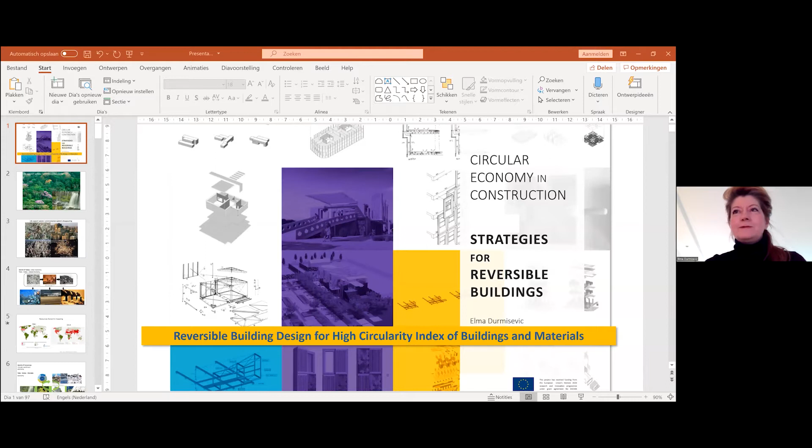Thank you very much. It's really a pleasure to be here, and thank you very much for the invitation. I found the concept of this festival really great. It reminds me of some initiatives we started in Europe, really bringing different stakeholders and creative industries together around a very serious subject, which I will also address in my talk today: how do we make a transition towards a more resilient design of the built environment and more effective use of resources on our planet, which is becoming more and more urgent.

So I will be talking about a new approach in design, which I call reversible building design, and we'll address some tools as Maurizio mentioned. I've been working in this field for more than 20 years and developed, within a number of European projects, tools that can help us design buildings in a more circular way, but also measure the performance of buildings, because we are creating a new world, which I like to call the new reconfigurable world.

That means that we need to develop a performance measurement system in order to know how to progress and when we are reaching this new world.

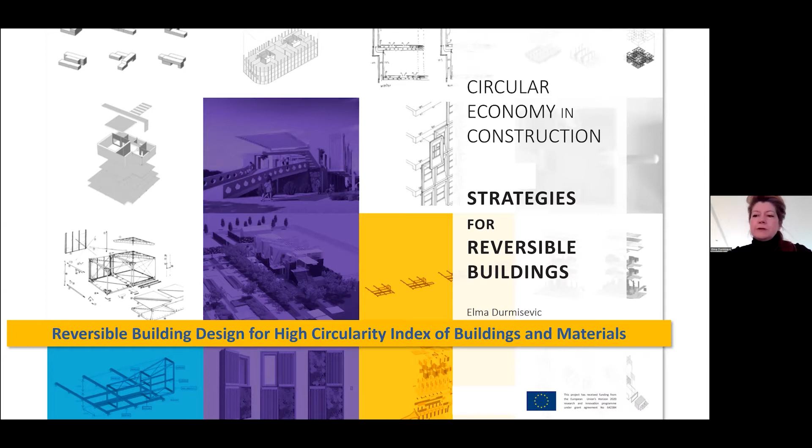The main driving force behind everything I will be talking about is definitely the great issue that we are feeling actually on a daily basis now with climate change, but also the latest wars that we are witnessing today, which are very much also about resources and how they impact economic systems. So it's very much how do we deal with the life support system on our planet, the environmental system, which gives us clean water, oxygen, and food to eat.

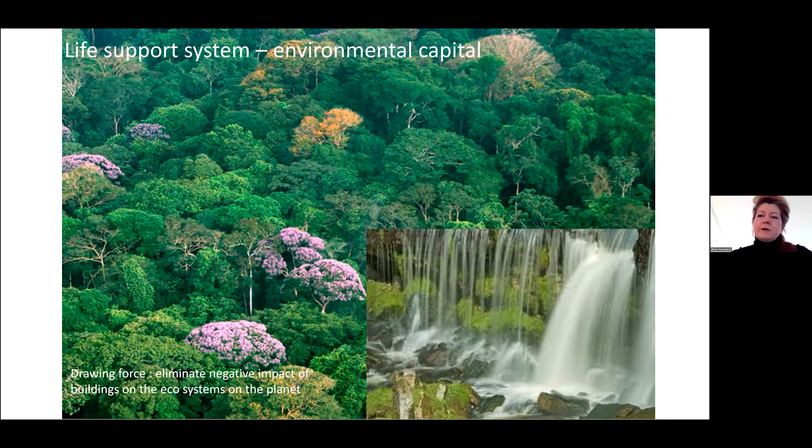Knowing that the way that we have started to use these resources, and the way we process them into a built environment, created negative impacts on the whole ecosystem of the planet, bringing us to the question of where we are now and what is the sustainability factor of the things that we've been doing.

I think we all agree these days that this sustainability factor of the approach of the economy of the 20th century is behind us, that it is not sustainable, being primarily focused on one linear approach to the use of resources.

On the other hand, when we look into the way these resources were used to form cities and the built environment, there's also a lot to be done on the shifts in our approach, how we create cities and buildings within cities. Obviously, now we deal with overpopulated cities, and the shift of population towards urban environments will increase even more. But the negative impacts of these tons of concrete and asphalt that are creating city structures which are not absorbing water, which are not producing clean water and clean air, are becoming devastating for living in them in general, but also for the planet.

So the key question is where we are now with this linear economy, which is based on taking, resourcing, making products and throwing them away, creating waste. The linear economy is also heavily focused on industries based on fossil fuel energy sources.

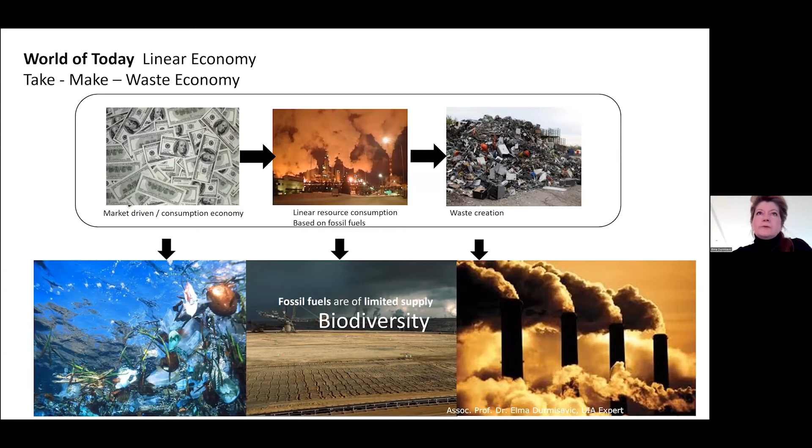Next to that, when we talk about the physical parts of the built environment, and really the resources which go into the products that we use, but also buildings and cities, it is very important to have this map in mind, which presents a resource footprint of countries produced by the Global Footprint Network on a yearly basis. What it tells us is basically how much resources are being used per country per year, compared to the resources that these countries have at their disposal per year.

What you see here is a different color scheme from 1961, when the planet was more green. That means countries had more resources at their disposal than they were consuming per year. This color coding started to shift towards more red in 2014, and almost half of the planet was turning more to dark red.

These red countries imply that they consume on average 4 to 5 times more resources per year than they have at their disposal. That means they are heavily dependent on the countries which are still green, but these greens are also becoming less and less green. And that is actually very well implicating the issue that I want to talk about when we talk about circular economy and circularity, and how do we introduce circular concepts in construction, and why.

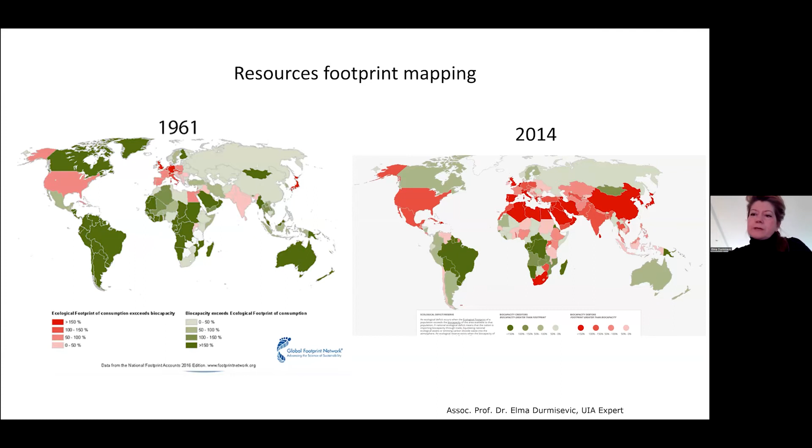It is very much about the way how we treat resources in all of our products. And as I showed in the previous slides, the linear approach to resources which brought us to these color coding schemes is obviously not sustainable in the long run.

The way forward definitely is in envisioning a new world, a remake world, where the waste from one system would become a resource for another one - what Cradle to Cradle, and Michael Braungart, introduced also like 15, 20 years ago as the Cradle to Cradle concept. But it definitely has to be pushed further and be taken into account when producing all products, from cars to cities.

So when we zoom into construction and the way how we build, the vision which we have here in Europe is definitely that this previous slide is a kind of priority that we want to go towards. The circular economy is number one on top of the list of the European Commission's policies for the future. But there is a long way to go when we look at construction.

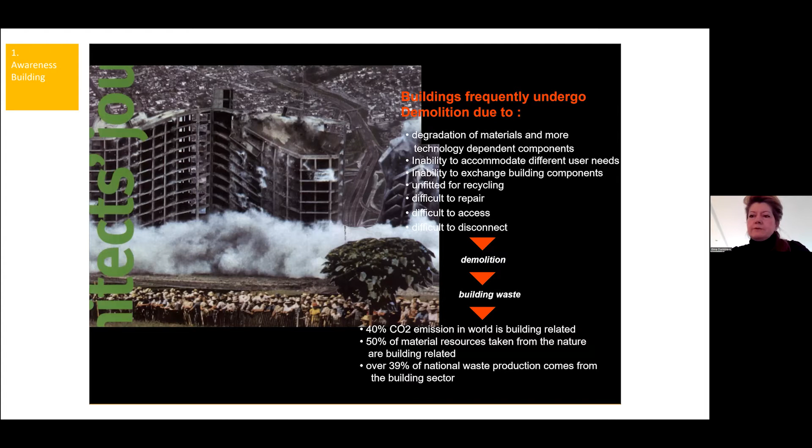So mainly from economic reasons to start with, the tendency is to demolish buildings because it is much cheaper than employing a lot of labor on these very labor-intensive deconstruction processes. But obviously, this results in huge CO2 emissions, material resources being lost, and waste production going up.

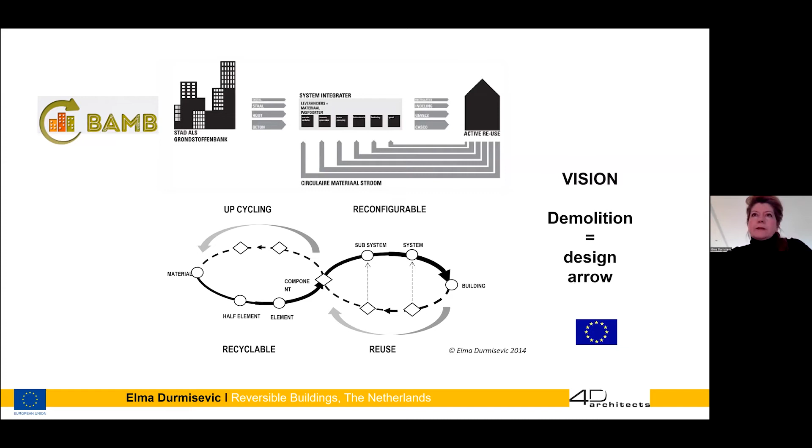As Maurizio mentioned, couple of years ago, about 7-8 years ago, I was one of the initiators of the European project Buildings as Material Banks, aiming to bring urgency and discussion on how we move further in design of buildings, how we define the whole system, and how stakeholders need to act within this new system of circularity and circular economy in construction. It became very obvious that in order to move further, we need to start seeing buildings as material banks and develop and enable materials to stream through different material feedback loops through their life cycle.

And that can be done only by a new approach in design. So this new design task would be to unlock the multi-layered capacity of buildings by understanding and identifying the three key dimensions of transformation that every building has, and unlocking the capacity of each of these dimensions, being a spatial transformation level, the structural transformation level, and material transformation level.

And this concept of three-dimensional transformation within buildings is heavily supported by the way buildings are put together, and definitely design for disassembly is playing a very important role in achieving the full circularity and the three-dimensional transformation.

This brings us to the notion of a new generation of buildings, which is the reversible building. The reversible building brings a new paradigm shift to construction, a new perception on buildings, and moving away from understanding building as a static product and static structure.

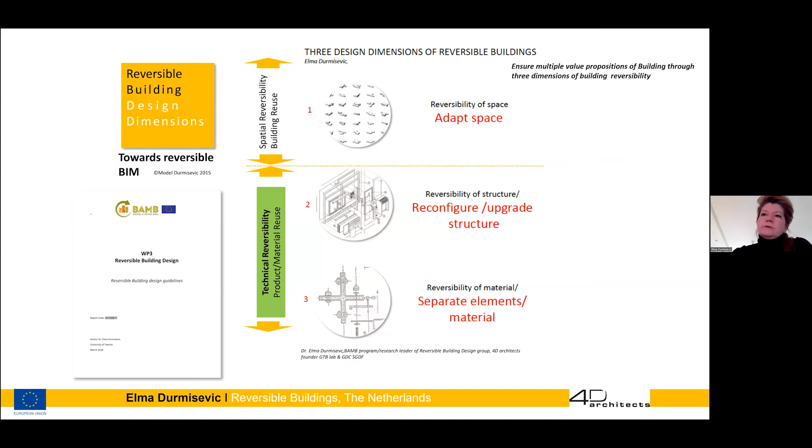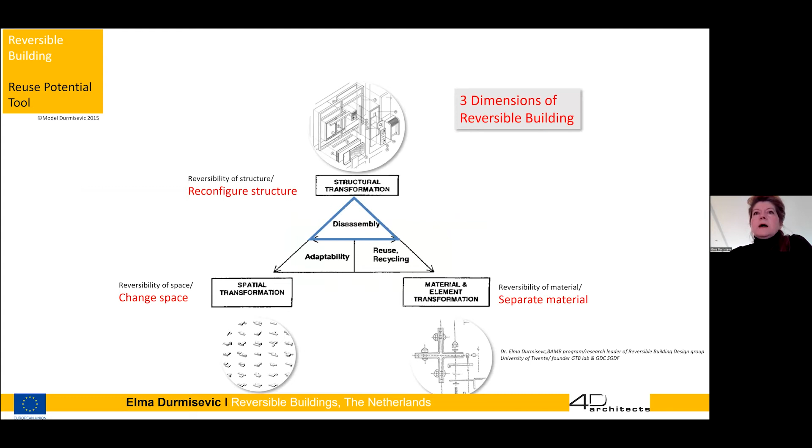These 3 dimensions together form a basic triangle of a reversible building, which has 2 major pillars: adaptability and reuse, supported by disassembly. And that was for me the starting framework for everything I've been working on in the last 20 years.

By defining this framework, it became possible to get a better understanding of the performance of buildings, to develop tools and design protocols for the design of such buildings—tools enabling us to understand the performance, reversibility, and circularity of buildings, and to cluster and systematize all buildings into three major groups: irreversible, partly reversible, and reversible structures. I'll come back to these tools later in my presentation and tell you much more about that.

But to start with, of course, when we want to take these big steps to a new world—very different from the existing one in terms of how we treat materials and how we build buildings—it is very wise to try to understand the full capacity of the existing buildings.

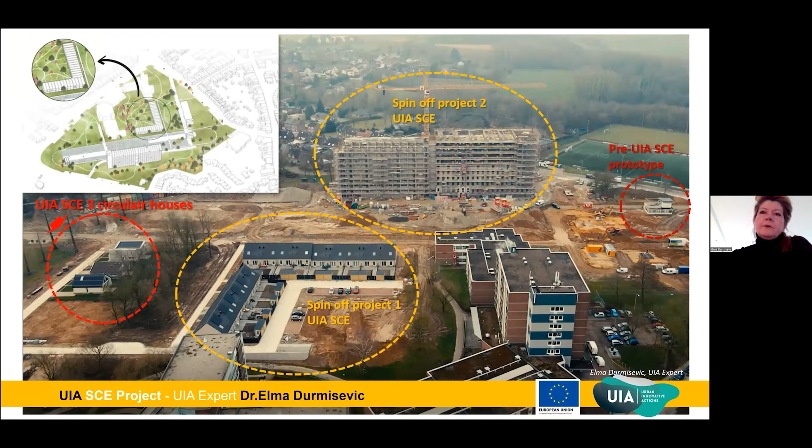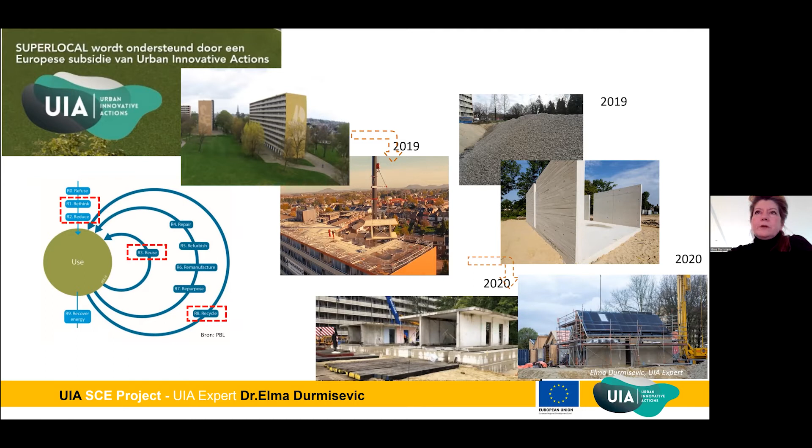And that's what we've done on a project in south of the Netherlands, where the exercise was about literally decomposing a 10-story apartment block, and trying to reuse all of its parts in construction of 3 new houses, and actually understand the processes behind that. Of course, the cost issues, but techniques to deconstruct and also techniques to build new ones, just to understand really what is the capacity of the buildings that we have around us.

And in the Netherlands, there are many of these kind of blocks built, especially in the 70s and 80s, and a big portion of the housing stock is made in such a way.

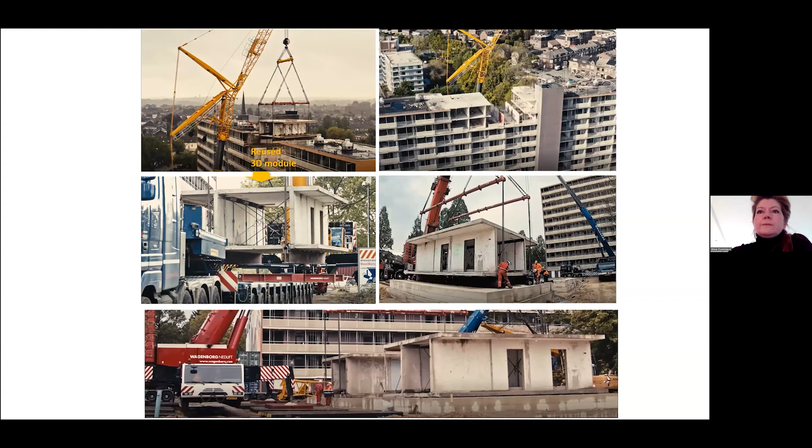So different recycling and reuse strategies have been tested, starting from creating recycling aggregates from existing concrete, to crushing parts of concrete into creating bigger chunks of concrete and using that as a facade, for example, going to really cutting of 3D units with the aim to reuse the structural parts to build this new structure for new houses.

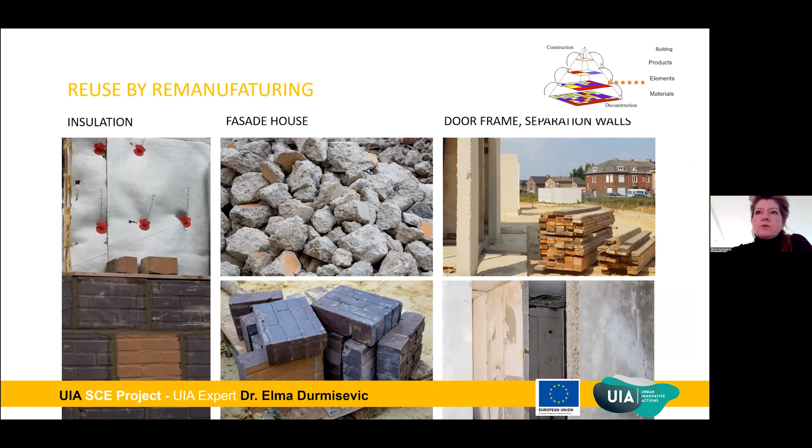At the same time, also the reuse of insulation has been tested, cutting of brick facade into smaller blocks, also cutting of some inner partitions of light concrete walls, on-site recycling and construction of recycling concrete has been done, and resulted in construction of these 3 houses, which have been built using 95% of materials from the donor building, which was standing next door. And a number of techniques have been tested there.

Of course, as I mentioned, this has been used to try to understand the impacts of these kind of processes on the environment and economy. And obviously, we did figure out that some techniques, many techniques actually, but for example the cutting one, if we compare it on the cost side, that exercise was like 10 times more expensive than making just a normal load-bearing structure out of new concrete.

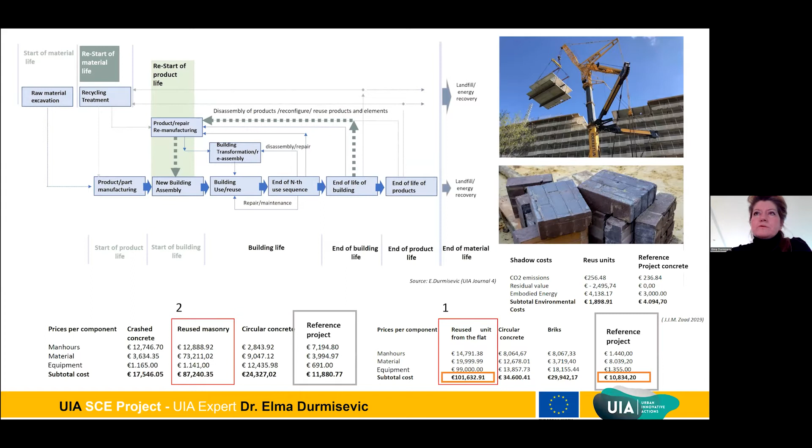And on the environmental side, as far as CO2 concerns, there were not much savings because lots of machinery had to be applied, transport and so forth. So that was tricky as well.

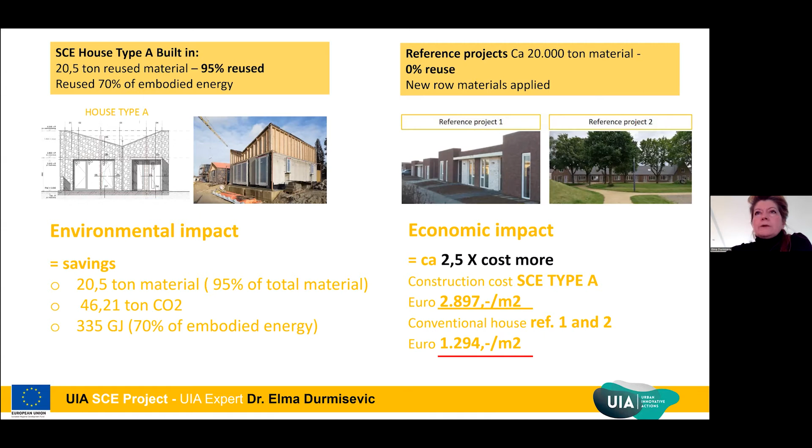But all in all, we did figure out that there are significant savings in terms of reusing of materials. So 95% of materials were literally brought into new houses. Also a significant amount of CO2 has been saved in embodied energy, but on the cost side, on average, the construction of these 3 houses was 2.5 times more expensive. And as I mentioned, it had very much to do with the processes around recovering, which were very complex, involving 5 to 6 different stakeholders, creation of new platforms, transport platforms, and so forth.

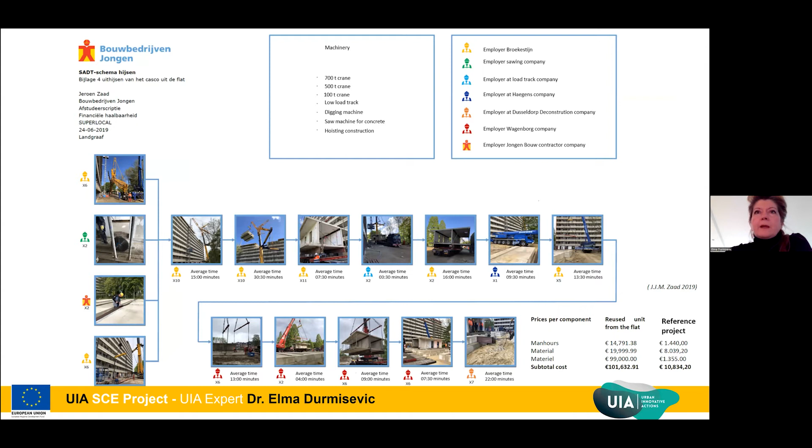So that all actually illustrates how complex it is to go to high-value recovery of existing buildings. On these lessons learned, the idea was to use the good, positive parts that we learned through the projects and try to build another 15 houses.

And what has been done then, of course, realizing how important it is to create kind of reversible structures where you can recover elements and reuse them again, and easily recover this, not with kind of heavy processes around.

The new products were developed, as you see here in the upper left corner, for recycled concrete, a kind of new shaped concrete block for the wall structure, or the brick, a dismantleable brick system for the facade of new houses. And obviously that would bring significant improvements in the costs, and did bring improvements in the costs. Although these new 15 houses were quite simple, cost-wise, the difference was much.

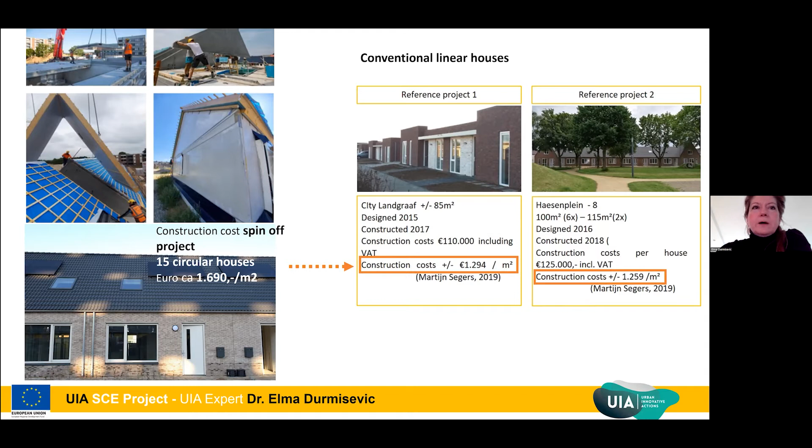So the new 15 houses were built with lessons learned, and the idea was to try to create as much as possible reversible houses, improving some existing systems on the connection side so that they are easily dismantleable, and trying to fit into the financial framework of the housing corporation. So it was promising, but we are definitely still not there. But the direction was quite clear.

Based on this quite heavy exercise, which took place over 3 years, there are a number of reports you can find on UIA sites. I wrote, I think, about 5 journals, and I'm now writing the final one on the final lessons learned. So you can find lots of concrete data there as a result of this exercise. But I also used that to provide recommendations to policymakers in Europe on the next steps, and what are the biggest barriers we see these days on the implementation of circularity.

Of course, we have to look into the position of the stakeholders and the fact that this conventional supply chain is not applicable. We saw that the stakeholders in the design, construct, deconstruct process are shifting in these kind of circular projects.

But most importantly, the focus is on how we basically enable, provide new economic boosts and create economies that will support circularity in construction, because it was obvious that circular economy does not exist at all, and that the existing regulations are not supporting circular construction.

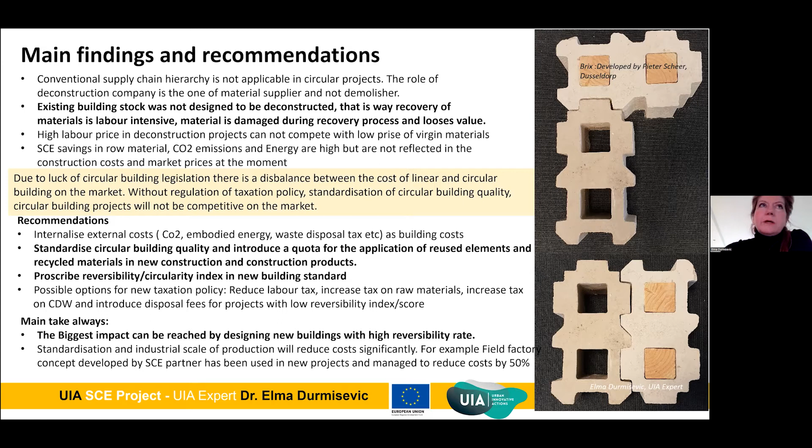That brings me to the new generation of buildings that I like to talk about most, not just looking into what has been done, because it is obvious that things were not really done properly from today's perspective. But let's go to the future and see what can be done to improve the situation for future generations and become smarter on how we build buildings and create cities.

This is the basic scheme of what reversible buildings, future buildings, are. They have two key elements, as all buildings have: a spatial one, which is reversible, and technical aspects, which are also reversible. As I mentioned in my previous schemes, this concept relies very much on adaptability, reconfigurability of the structure, and separability of materials.

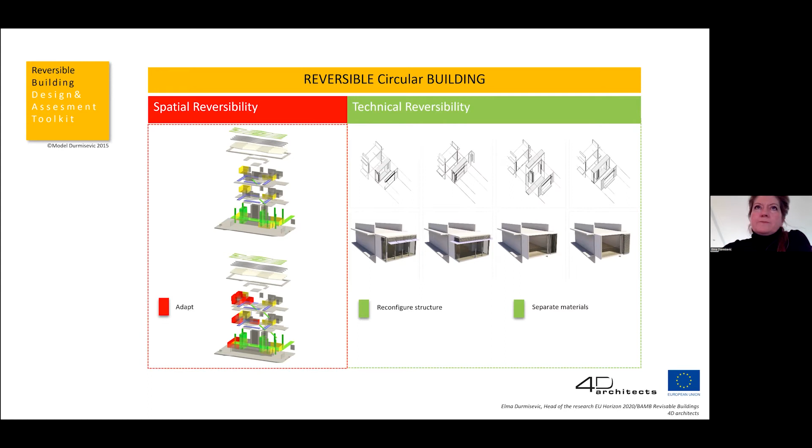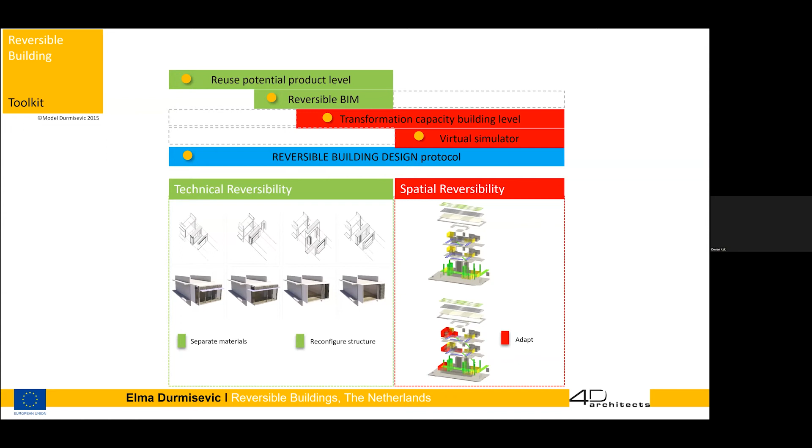Through the Buildings and Material Banks project, I managed to set up this whole toolkit, which enables future users, or the ones who really want to take this path, to first design buildings following the design guidelines and principles, but also measure their performance and use the tools during and after the design process to assess reversibility on the technical level and on spatial level.

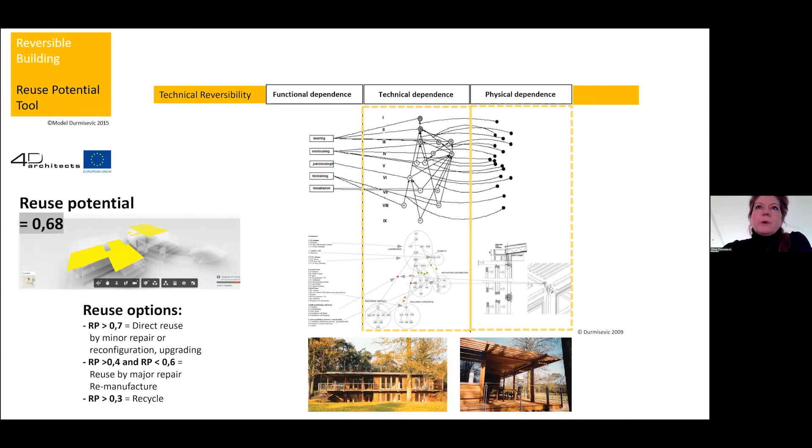And it results in a number, a score between 0.1 and 0.9.

And the transformation capacity tool looks into the ability of a building, its capacity, to change function or adopt different functions without demolishing parts of the structure or the whole structure. Just the level of core capacity is taken into account as one indicator, the capacity which also takes into account the space for future installation services and distribution of installations.

The disassembly capacity on the building level is mainly about separation of major building functions, the position of the core elements and fixed parts of the building structure, which will provide space for future changes, and the dimensions of the major block in height and width, which have a capacity for different functional configurations.

So those are 4 key indicators that are being calculated and have 16 sub-indicators, but I will not be talking about this one today.

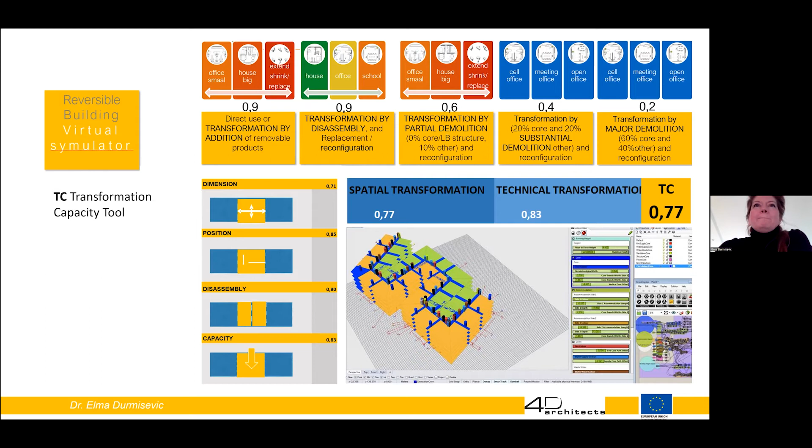And the design process, as sketched here, this slide is mainly to give you an understanding of which part of the design process each of these tools has priority in. Obviously in the preliminary design phase, the transformation capacity indicators play an important role.

And as we move towards the definitive design and technical design, the technical aspects of reversibility with their 8 indicators are then important to look at.

A number of these guidelines and definitions of indicators and so forth can be found in these documents on the BAMB website and on the European Commission's website. The principles for building design, which I haven't shown yet, have been integrated into circular economy principles by the European Commission.

So I will now talk more about this technical reversibility, and what is being measured to assess reversibility and reuse potential of building parts, and how these indicators are integrated into BIM to get a better understanding and to speed up the process.

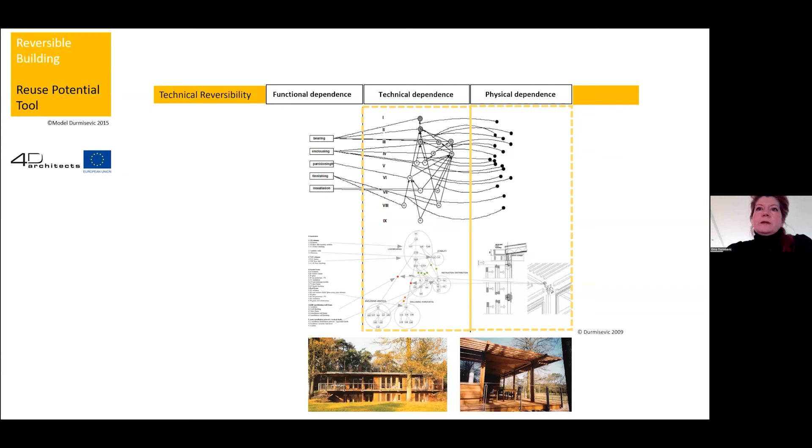So the three major dependencies addressed by this tool, which measures reuse potential, look into functional independency, technical independency of parts, and physical independency of parts. As I mentioned, these three dependencies that are measured are important to understand independency and exchangeability of building elements.

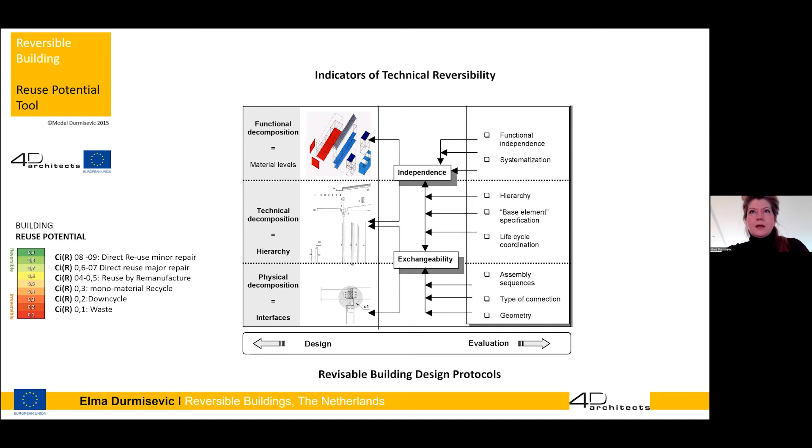And in order to do that, 8 indicators have been identified. I will go through each of them just very shortly, to give you an indication of what indicators need to be taken into account when measuring reversibility and reuse potential.

As I mentioned, one of the first is functional dependency and independency, looking into integration of maybe two functions into one element or not, and the interaction between different functions, which is very much present, for example, in the interaction between installation services and load-bearing structure.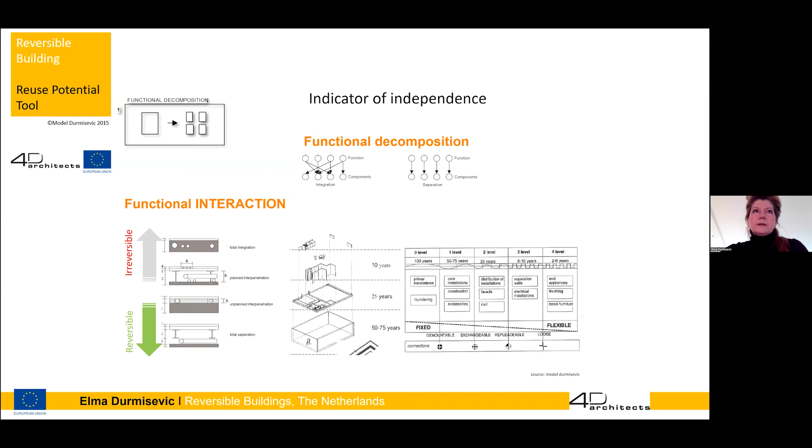The relational diagrams emerge once we start creating configurations and structuring elements into different functional groups or not. What you see here on the left-hand side, in the upper corner, unstructured relational diagrams are typical of the way buildings are built now, where it's very difficult to identify any system in these relations, and that's why buildings are being demolished.

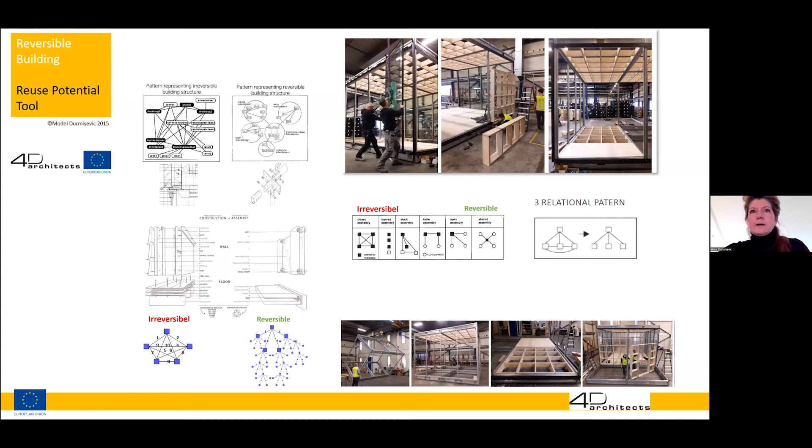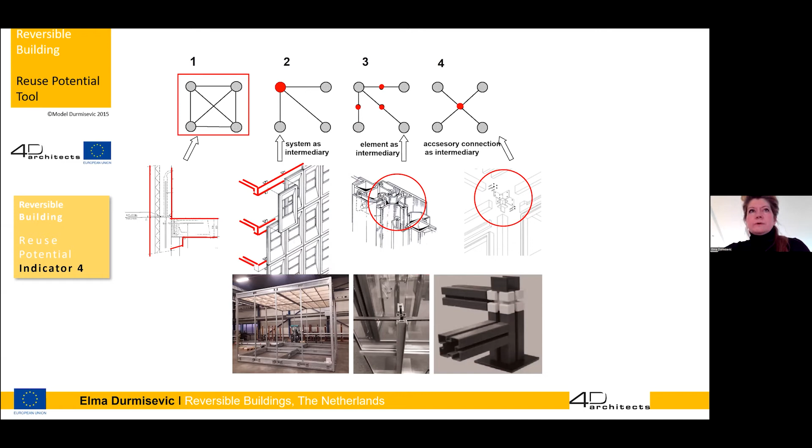These are different patterns of relational diagrams. And of course, we want to move more toward the lower level, which is a more open hierarchical diagram with structured parts clustered according to their functionalities. The base element is also a very important indicator, which helps us take one element out without affecting the other one. This base element is present on different levels of the building.

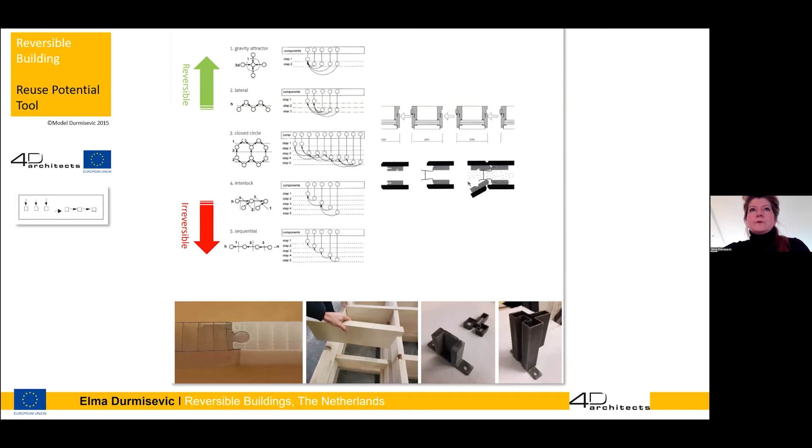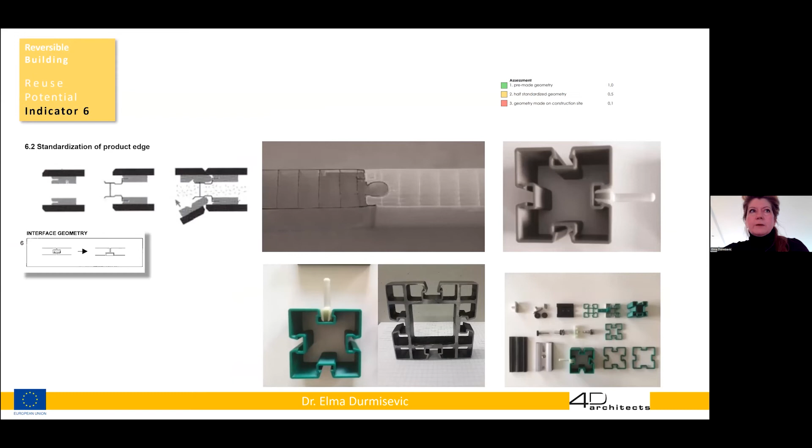Also, the assembly or disassembly sequences will affect the ease of taking something out, and whether it gets damaged during the process. The geometry of the component edge is also a very important indicator, especially when considering the damage that can occur based on the geometry applied. And the standardization of the product edge also helps speed up the construction and deconstruction process.

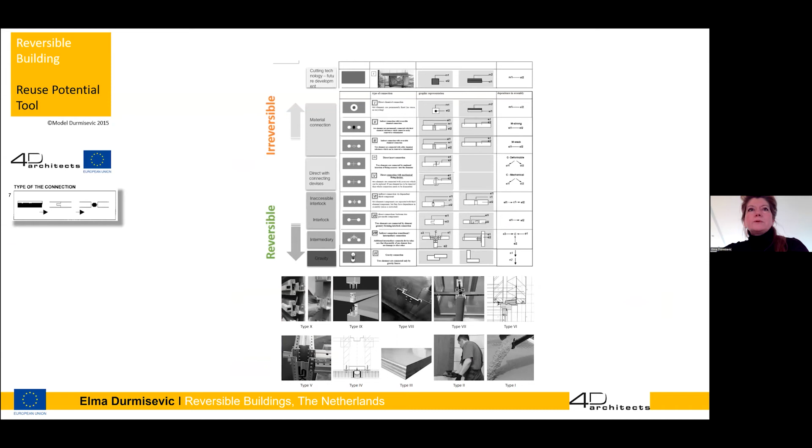The type of connections — there are 11 types of connections which I've identified so far, used in these tools, ranging from reversible to irreversible. And this is basically what the analysis looks like when you start manually trying to understand and figure out how reversible a structure is.

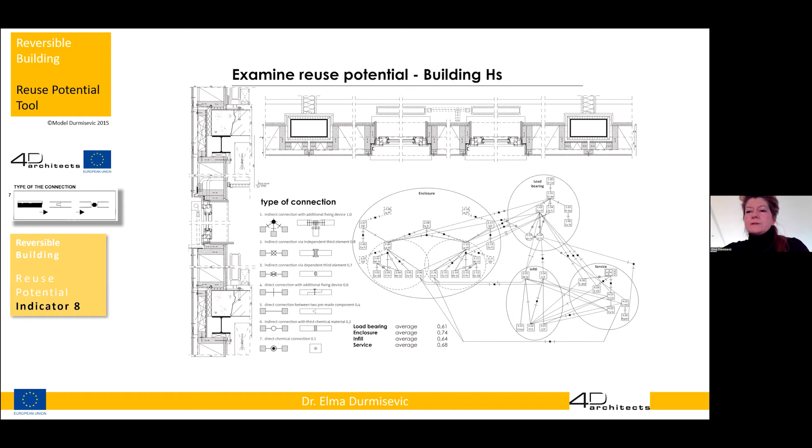I did this for a long time manually, literally just drawing these relations, identifying functional clusters, which belongs to which function, and the types of connections.

And the reuse potential score reflects the reuse options of this element in the end. At the same time, it reflects environmental and economic impact of the operation, because it measures how easy it is to take something out without damaging it, and to bring it back into a new cycle of construction. That means the energy and transportation needed to recover the element, repair it and bring it back is taken into account, and that is reflected in the environmental and economic impacts related to the score.

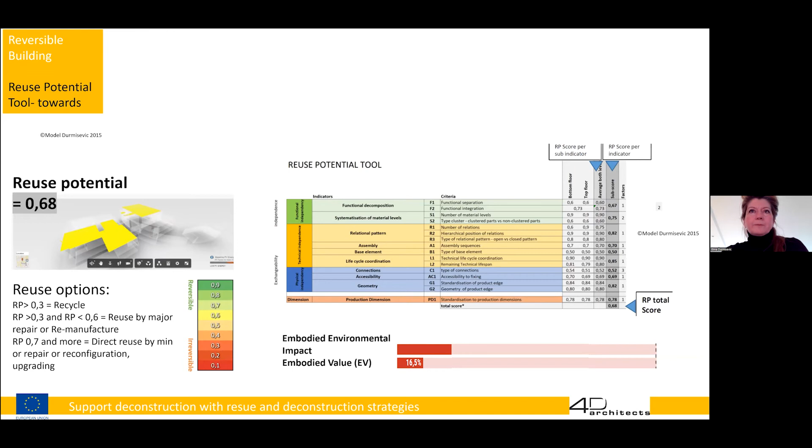So once again, when you start manually to assess, this is a part of Excel-based assessment of reuse potential, then this functional decomposition and technical decomposition matrix is created. On the horizontal line, when you move horizontally, you will see different functions that elements have. Each element is placed in the column of its function.

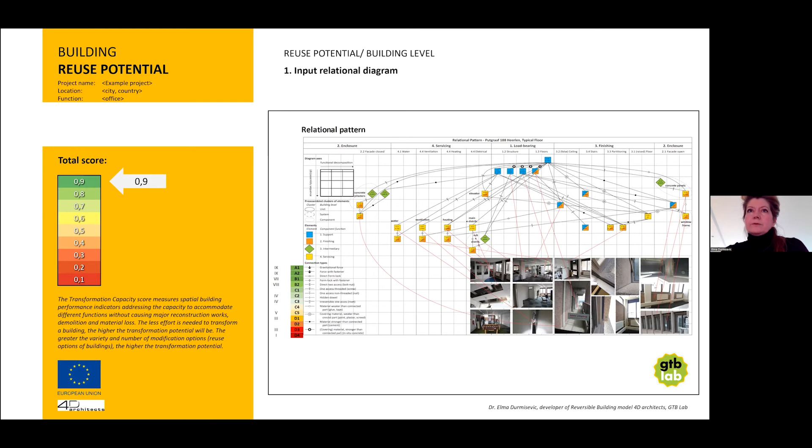Vertically, the assembly sequences are addressed. The element is placed in the sequence when it's being assembled, so that the dependencies in assembly are also analyzed, and how many steps you need to take out in order to take something out is taken into account. That's translated into the matrix that systematically illustrates when which element is assembled with what type of connection.

This is the base for the calculation in Excel, which results in a reuse potential score on a building level, where we calculate the reuse potential of all elements brought to the building site. Reuse potential score on a system level is the calculation of all elements within, for example, a facade system. And the reuse potential on the product level is the reuse potential of all elements within a window, for example.

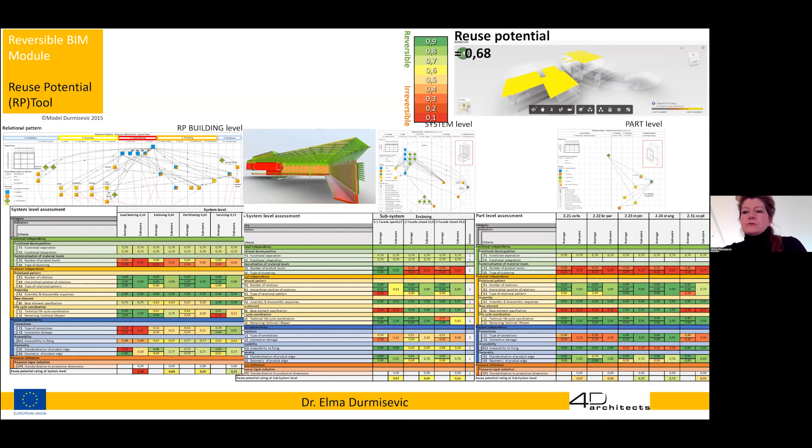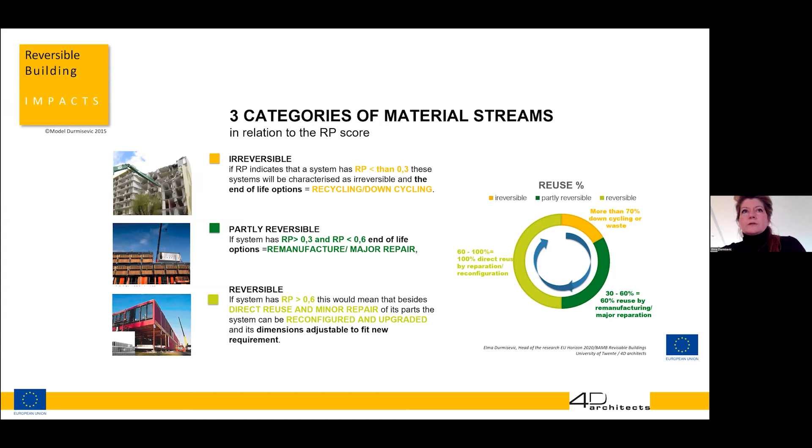As I mentioned, the reuse potential score is linked to the reuse options and helps categorize the results into three categories, or identify the category that the building system or product belongs to. It reflects the effort needed to bring material back into a reuse cycle again. The shorter the reuse feedback loop is, the less effort you need to bring the material element back.

That's why the elements which have direct reuse would score higher, with 0.9 or 0.8, for example, versus elements which have to be crushed down and recycled. They go back to the beginning, the start of the product life - meaning a recycling facility - so the feedback loop is much higher and bigger, and much more effort and energy need to be put into this recycling process. That's why the impact of this process from an environmental and economic point of view will also be very high.

In reuse potential scoring, it will be 0.1 or 0.2, just to give you an idea how that works. And this helps bring understanding of the circularity profiles of the building.

In this scheme, I also introduced a transformation capacity part, because of course the best thing is not to demolish at all. A building that can be reused would have high reuse, high transformation capacity.

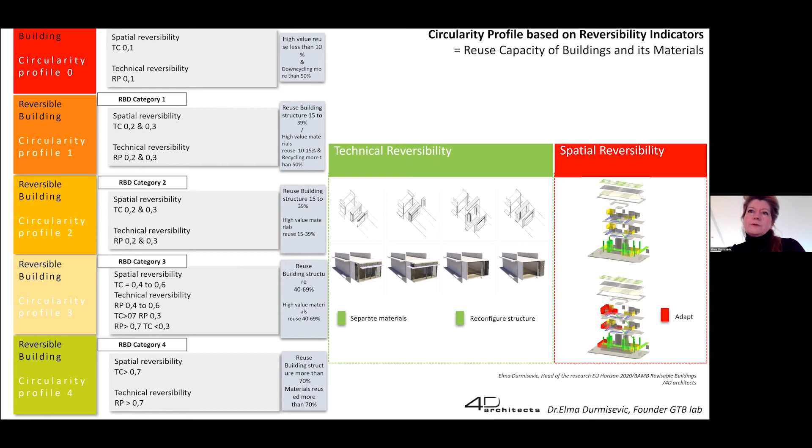So this circularity profile provides some kind of ambition ladder towards circular buildings, which is then used also in the procurement phases, to push your ambition towards which circularity level you want to achieve.

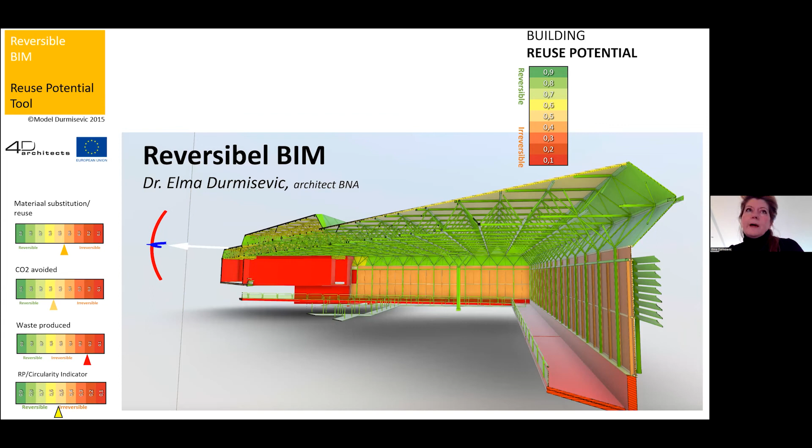So I was talking about this manual assessment of reversibility and reuse potential, and obviously you can understand that it takes lots of time to do this manual work. That's why at a certain point I decided to try to speed it up with integration into BIM and see whether that would work.

And this BIM, I call it Reversible BIM. This has been tested also on existing buildings, where we would gather information from the existing building, do the 3D scanning and create point cloud files of the existing building, then map drawings with the point cloud files, and then create Reversible BIM, add the plugins that I will show later on, do reporting, and that is working unexpectedly well, actually.

This is an example of a 3D point cloud file of a museum in the south of the Netherlands, which will be deconstructed at the end of this year. It's a Roman museum. So after scanning, the model was created, and as you understood from my previous slides, we need to be able to...

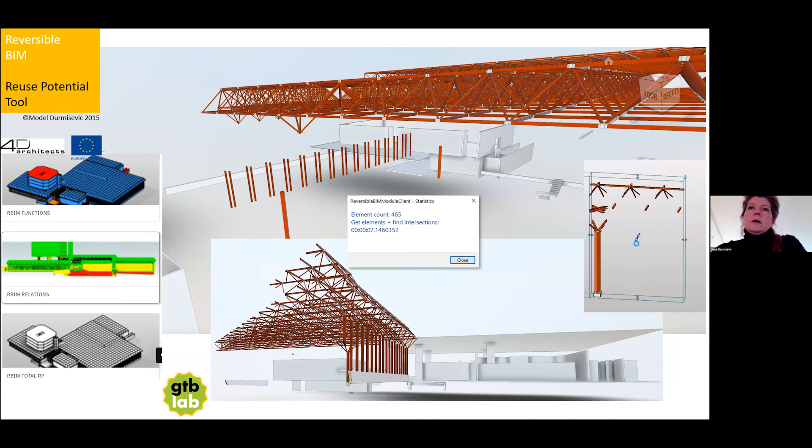analyze the relations between all elements. So it is very important to build a BIM model where you can identify all elements and also analyze interactions between the elements. There is a reversible BIM protocol which is put in place for those who want to use a BIM model to assess reversibility and reuse potential. Then modeling needs to take into account these features.

Later on, the materials are added. They use the ICE database in order to calculate avoided CO2 as well. But I also added the technical life cycle database from the Netherlands, because a model measures the remaining technical life of the parts.

The part which was quite difficult was to assess the technical life cycle of materials for old buildings or monuments which are not in the technical database of new materials. So I managed to set up a list based on talks with experts in renovations and architects working in renovation of monuments, just to have a start on that point.

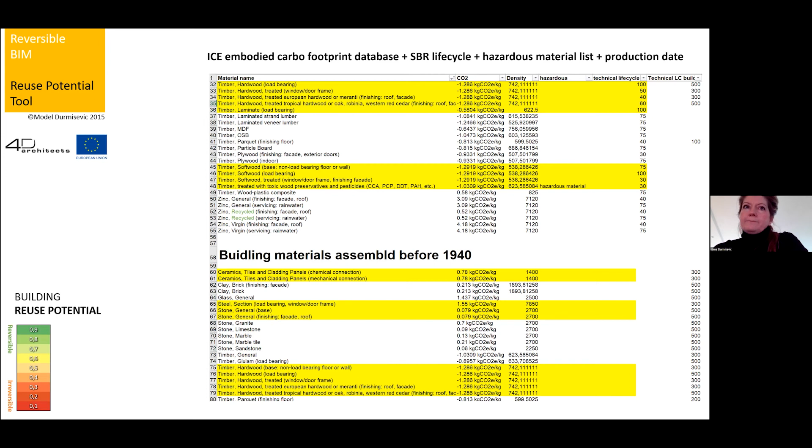Once that is done, based on the classification of connections, which I also showed, the connections are assigned to all elements. Of course, parts which have the same connections can be selected at the same time to speed up the process, and there's information on how many connections each element has and what type of connections exist.

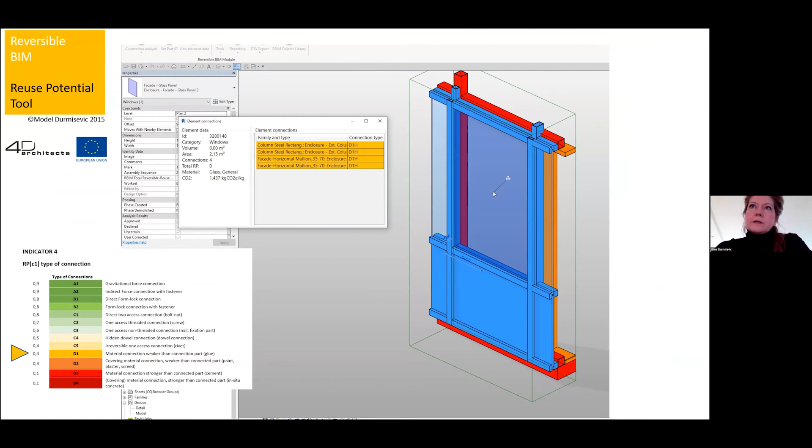Also, hazardous connections—as you see here, D1H—the H would mean there is a hazardous component in this connection, asbestos for example, and that information is also taken into account when assessing the reuse potential in the end. As an output, there are different types of outputs.

Just to give you an idea how complex buildings are and how this digitalization helps us get a better understanding of the complexities: this is a list of elements and the number of connections they have, and you'll see that the majority of elements have multiple connections and different types of connections.

There's also a difference between what I call connections to and connections from. When we assemble an element, we create connections to assemble that one element, but once the element is assembled, other connections are created with it to assemble other elements. This distinction is important when assessing dependency between elements.

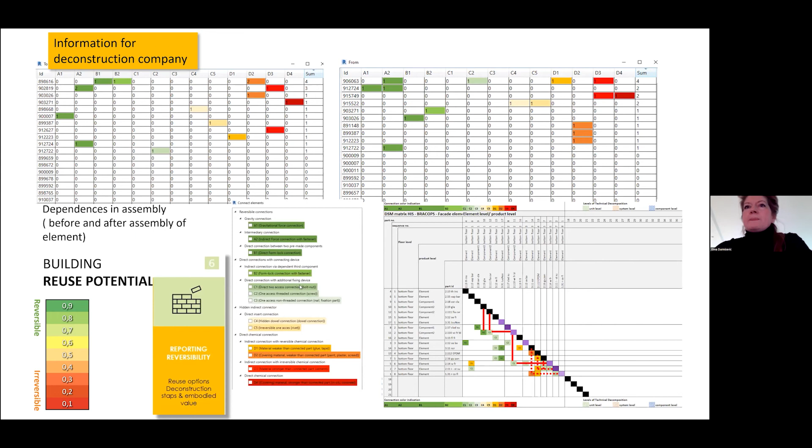This is the Excel matrix which I showed in the beginning—you see it here in a small scale in the corner, which was done in Excel.

Another slide just to give you an impression of the complexity that buildings have in themselves, and again how BIM helps us go and look through it.

These are relational diagrams, and these ones are now automated. You can imagine that in this museum we identified 7,277 elements, and the color coding here relates to the number of relations these elements have—elements with up to 5 connections are green, and more than 10 are red.

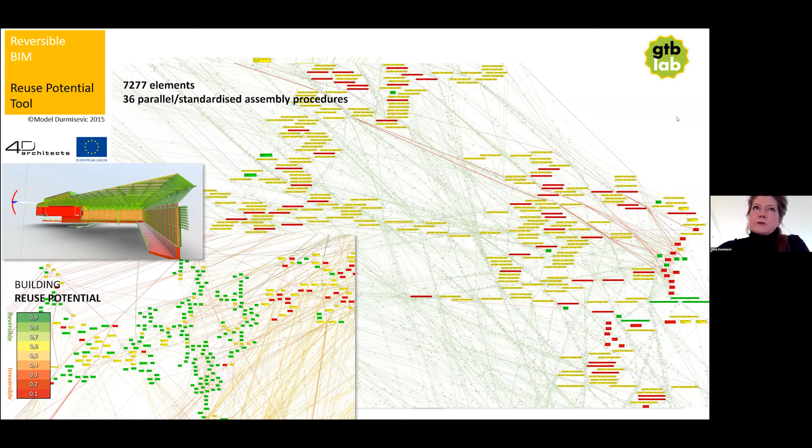But here we also identified 36 parallel assembly and disassembly procedures, which helps construction companies understand the construction process, for example.

So the indicators I was talking about in the previous slides when explaining the manual assessment are integrated into BIM. In the end, when all parameters are put into the model, one of the outputs is a color coding, which actually expresses the reversibility and reuse potential of individual elements.

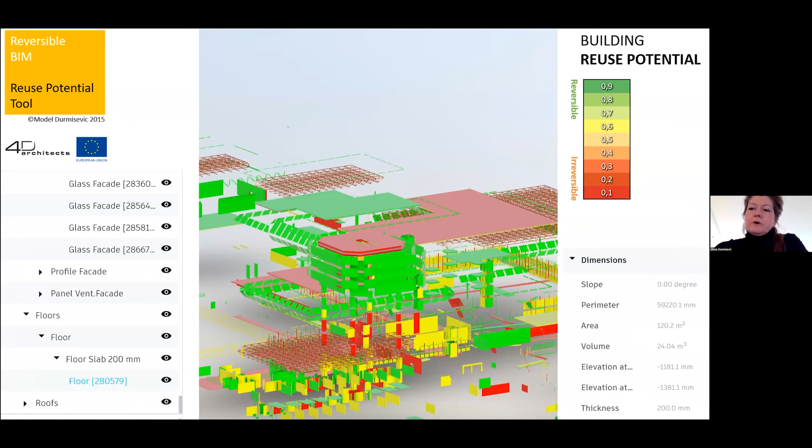At the same time, we get lots of outputs which you can expect from BIM: type of element, its functionality, but also volume, embodied carbon, the reuse potential per element, and then avoided carbon and avoided volume based on the reuse potential of the element.

A nice thing is there's gradation of data that can be shared with different stakeholders. This is a graph that users and owners of buildings are quite interested in—a kind of helicopter view on what materials I have in a building, the percentages and tonnages of different materials, the reuse potential category of a building, and the CO2 that can be avoided.

And tonnages per function, if you want to do something with the enclosure or facade. You know, for example, in this building 55% of all materials are in the facade, and 63% of CO2 is embodied in that facade. So it's kind of a helicopter view.

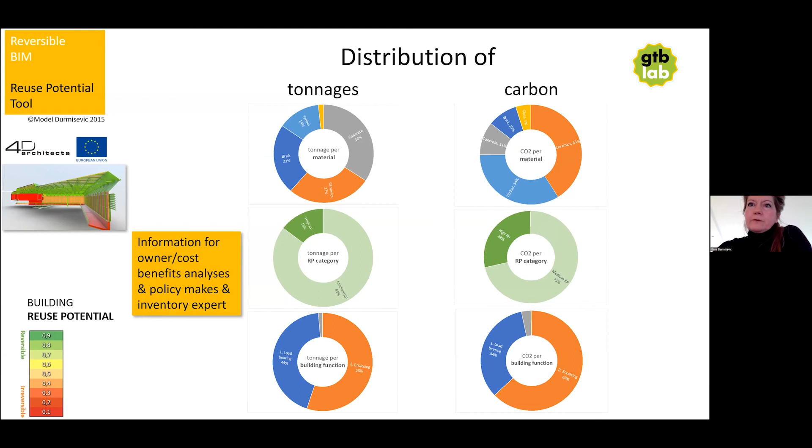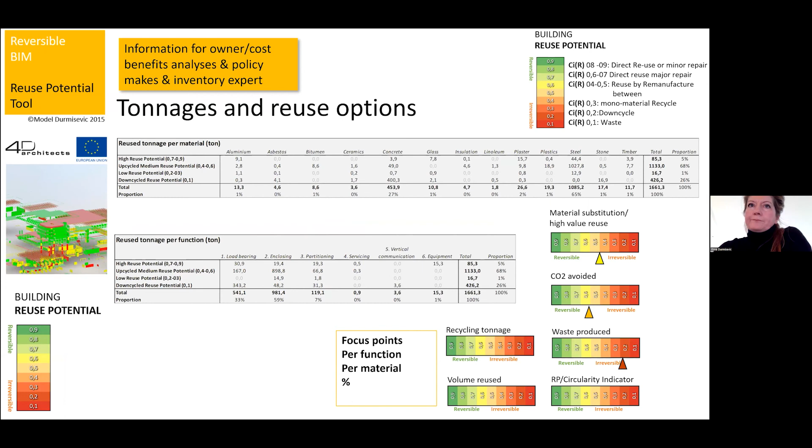You can also zoom in on each individual material, which is then structured along the reuse options that materials have, so you can assess the reuse potential, grading, and score of individual materials, which can be handy for industry or construction companies.

This is also an overview of different reuse options—materials structured along the line of reuse options. Here we see mapping of embodied material, for example in tonnages, and what can literally be reused out of this material, because during the reconfiguration or recovery process you will always lose some materials.

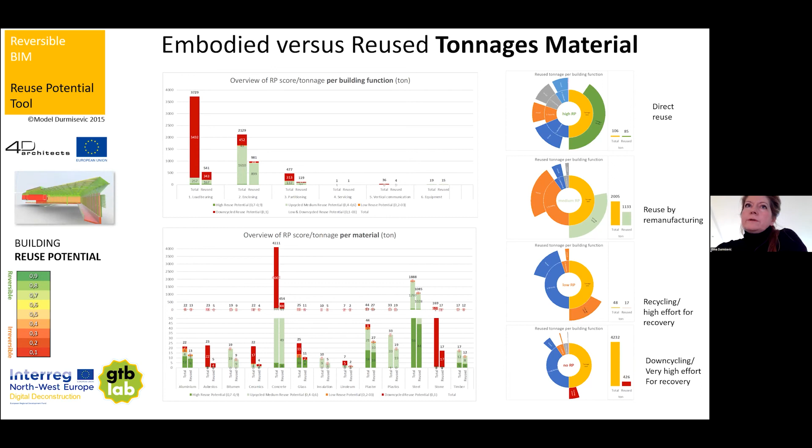Depending on the reuse option, the material is, you will lose different amounts of materials, and that will be reflected on a carbon as well. So there is an embodied carbon in a building, but depending on the reuse scale, the reuse stage of the or option of material, carbon will be lost in some percentages. And that's also being illustrated here.

What's also interesting to look at is this material versus carbon comparison. For example, concrete has lots of tonnes - it's a very heavy material. So its contribution to the waste when we look into tonnages is very high, but when we look into CO2, it's very low. Steel, on the other hand, is less heavy than concrete, but its contribution in CO2 is much, much higher than concrete. So these kinds of comparisons between materials, their contribution to the tonnages of waste versus contribution to the CO2, is also quite interesting to look at.

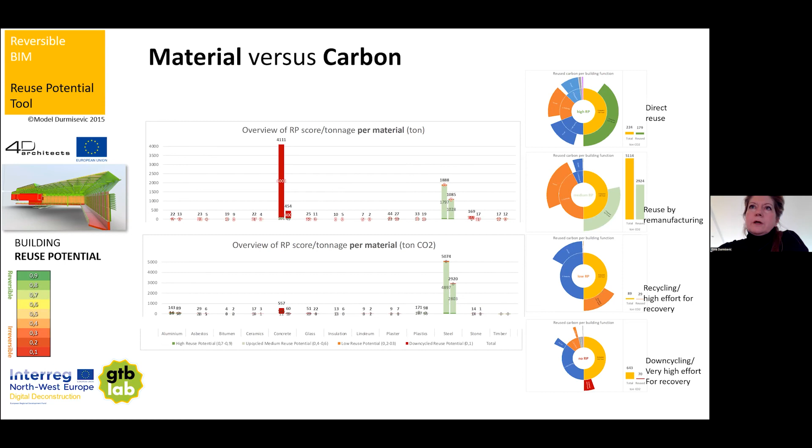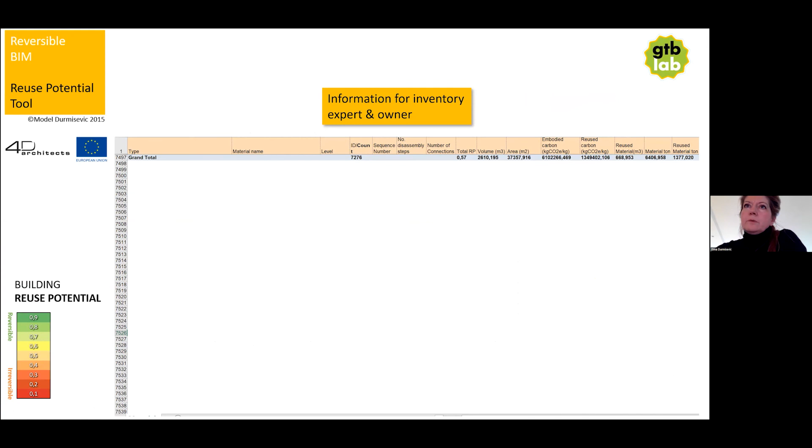I'll just run through this. This is an additional output, which is very often used by inventory companies doing inventory. So there is inventory data which you can get on a building level, giving the total amount of materials, carbon, number of products, average reuse potential, and then it can be split into the functional parts like facades, equipment, finishing, with the same amounts. This going back per different functional groups - volume, carbon, material - and then the functional groups can be split further to their parts, systems, components, and that can be split further. I didn't include that one just to spare you some time.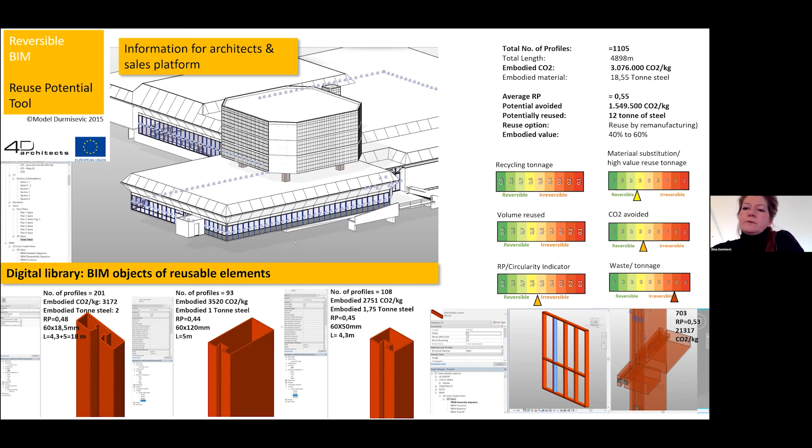Once these analyses are done, what we also do is identify elements which have high reuse potential, and then create BIM objects. This is an example of BIM objects of steel profiles from this museum, which these files are shared with the Jansen producer, one of the biggest steel facade producers in Europe. They also created these profiles in the 70s - they produced these profiles for this project and found it in their archive from 1970. They still use similar profiles. So we have shared the BIM objects so that they have included them into their digital library and their harvest maps, where they then also purchase these materials for use in new construction. But these BIM objects of reusable materials will definitely, I think, be in the future catalogs of materials that architects can use when designing new buildings, which will speed up use of reusable parts in new products.

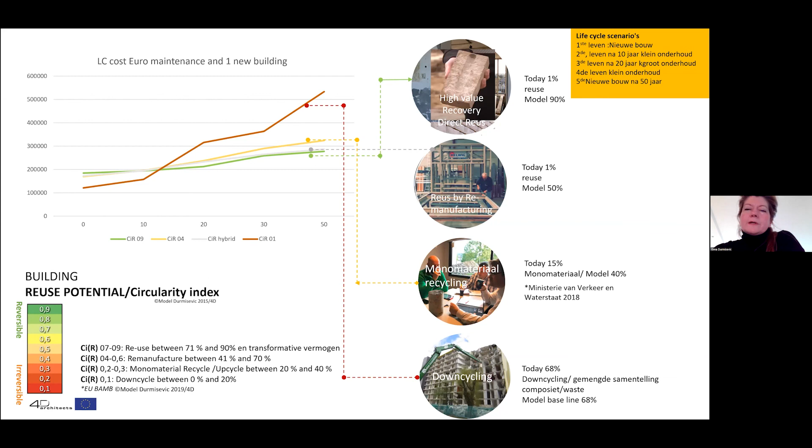So now going back to the assessment models and circularity profiles, what that can mean - it helps us understand, for example, the economic impact of different types of construction, where the green line would be a kind of reversible building in housing. This is in the scenarios for housing in the Netherlands, how often they are being built, rebuilt, or demolished, and so forth, over a total life cycle of 50 years. So if you do it in a reversible way, or in different scenarios of reversibility, what would be the total costs of that operation? This total life cycle costing of an operation is being looked at on an energy level, on a CO2 level, on a waste level, and so forth. This is developed for the south region of the Netherlands, based on their predictions of how many buildings they need to demolish in the coming 10 years and how many need to be built again.

Understanding the type of economy that can emerge when building one or other circularity profile in the future.

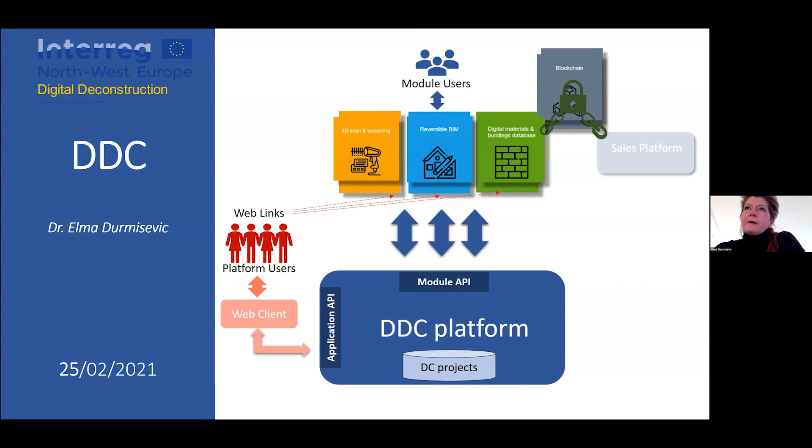Talking about digitalization, the reversible BIM module is then integrated in a digital deconstruction platform that Maurizio mentioned we are working on now. It's also a European project where we are bringing four modules together on a digital deconstruction platform that will help decision makers make decisions on strategies for construction and the reuse of materials. So we bring together a 3D scanning module, reversible BIM module, digital database, which is then linked with blockchain, linked to the sales platform. And the idea is how these modules work - we scan a building, create a reversible BIM out of a building, and then the material list of reusable parts are created and connected with the sales platform.

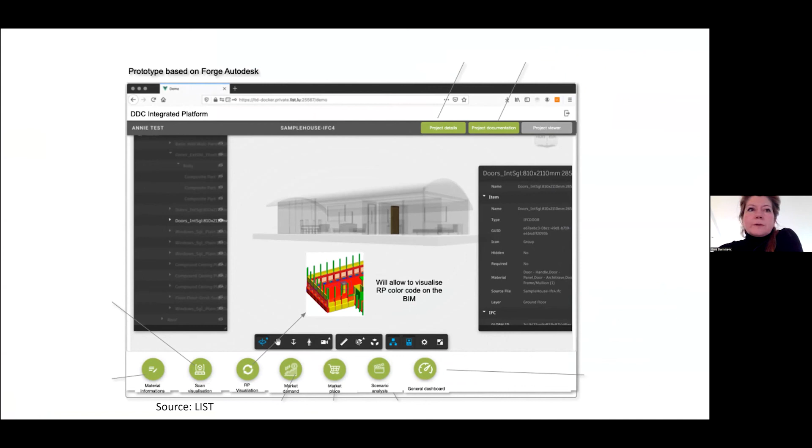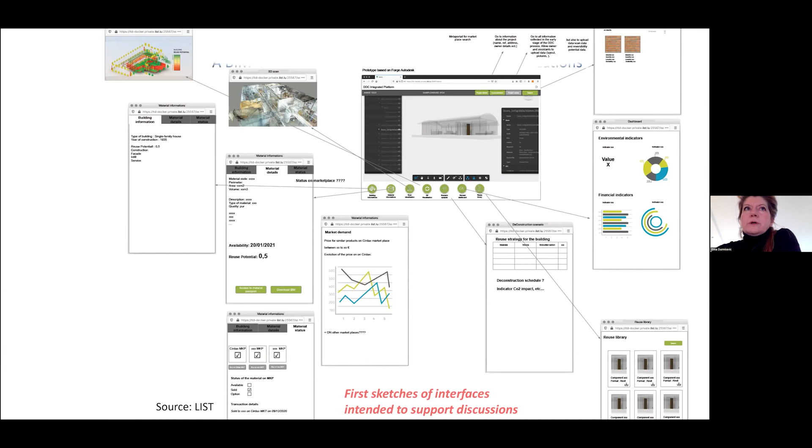The platform itself is being developed by LIST, an institute in Luxembourg, and they are putting these modules together. The idea is that through one, you get a one-stop shop, let's say, as owner of a building, with all your data on the building, with respect to the materials in it, its status, and what cost-benefit analysis needs to be made.

I mentioned a couple of things, and obviously this transition we are talking about is not something that will happen tomorrow. I've been working on this for more than 20 years, and in this period it was very clear to me that we need to be systematic and go step by step. That is also the reason why I initiated a couple of hubs and labs in Europe.

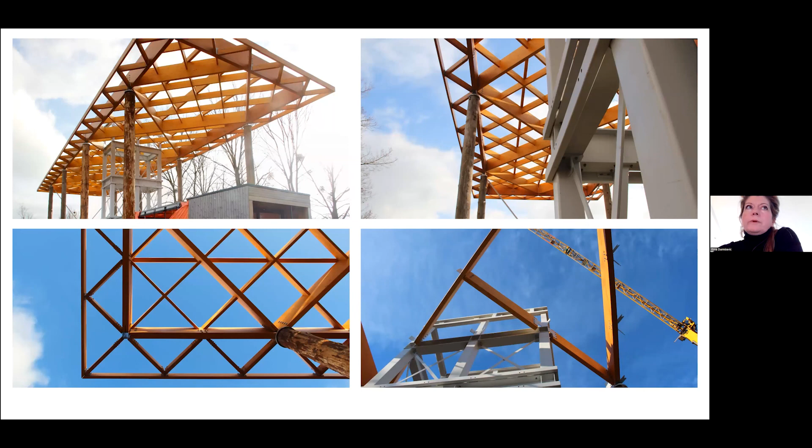This is one in the Netherlands, the Laboratory for Green Transformable Building, which is under construction right now. The aim of this lab is, on one hand, to demonstrate that we can build buildings which reduce waste and CO2. It is also a demonstrator of how buildings can be designed and what conditions are needed to develop new products and reversible buildings.

On the other hand, the aim of the lab is also to establish a monitoring and scoring system, help with standardization of the quality of circular buildings, and establish a monitoring system on a city level, where we capture information on material streams through the city and help identify the infrastructure needed to support circularity of materials for new construction.

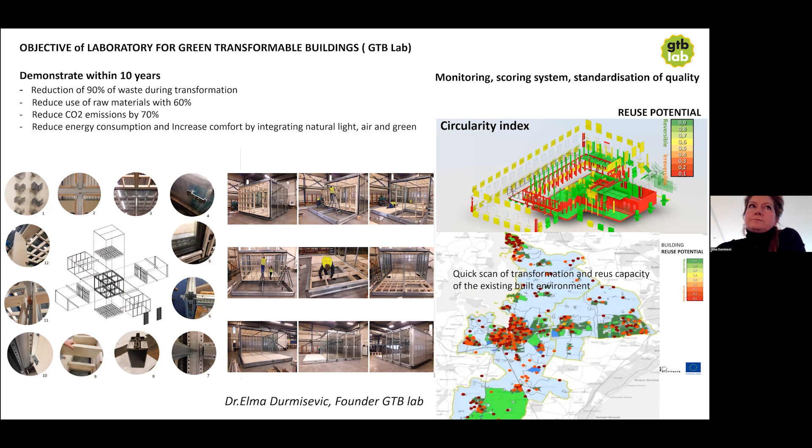So in terms of demonstration, this has been done and tested previously, and some parts are now also brought back into construction of the lab. This indicates - now you will recognize some things here, such as the geometry of the product edge, or the reconfigurability of parts.

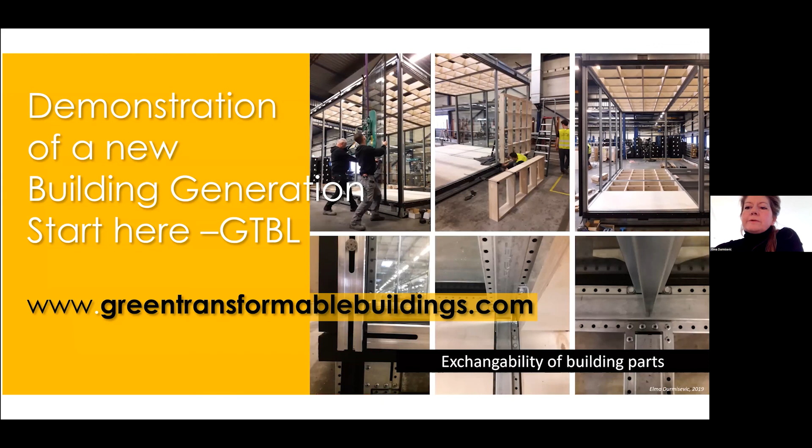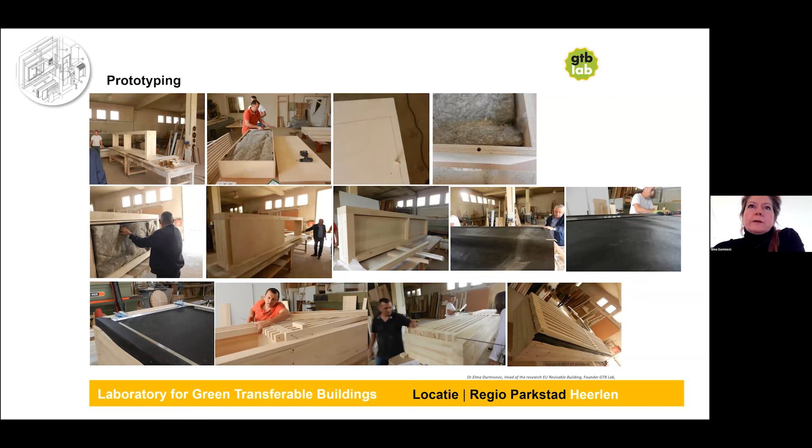What you see here is the facade, the floor, and the ceiling, and they are all the same standardized, prefabricated parts, but they are also reconfigurable, meaning you can make a window in them, or an opening, or a door. That is what I mean by reconfiguration when talking about that dimension of transformation.

We also support the development of new products which will enable reversibility, such as these base elements I was mentioning. This is a production line at Jansen, where we are trying to develop new profiles that will enable easier recovery of building parts.

Now, I have also established a center in Southeast Europe in Mostar, called the Green Design Center, where we are actually using the existing structure - you'll see it here in the lower right corner - the existing military barrack, which was built by the Austro-Hungarian army in the 19th century.

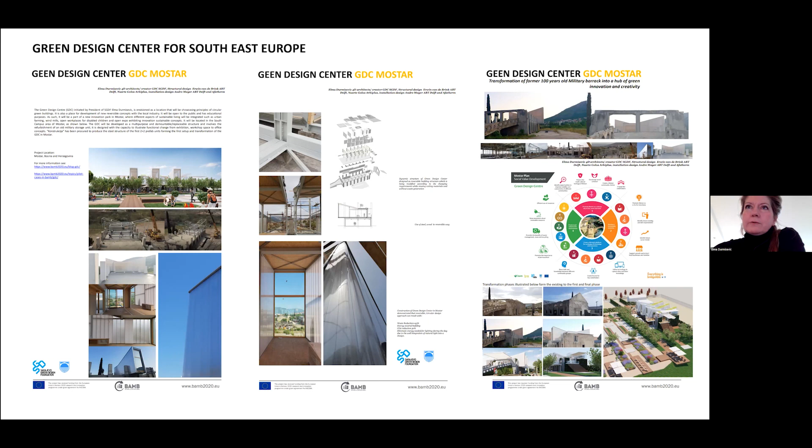And we did not demolish it, although the city thought we should. We basically reused the robustness of this structure to develop a reversible approach, adding reversible modules which help create flexible and transformable structures inside. That's another experiment happening in Southeast Europe, and this lab in the Netherlands and in Southeast Europe are connected, trying to spread the word on circularity in different regions of Europe.

In order to share the knowledge, at the moment I'm also working on two other platforms. This is an ICT knowledge platform for circular buildings, which will be launched after summer, where guidelines, policies, toolkits, but also exemplary construction products, materials, building materials and systems will be on the platform. This will be mainly European-based information, but we might extend it to other countries as well. A circularity meter for material streams will be on that platform too.

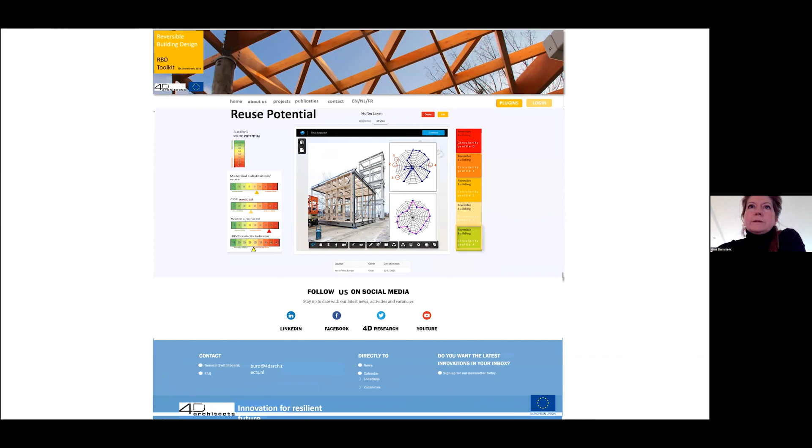There's another one, the Reversible Building Design platform, where much of what I was talking about - the design principles, but also projects, instruments, and the Circularity Index - will be hosted, with reversible building projects and their results on reuse potential, also a light version. We are working on a light version for calculating reuse potential, for those who find Excel too complex, and the reversible building design guidelines will be there as well.

I think this is my last slide.